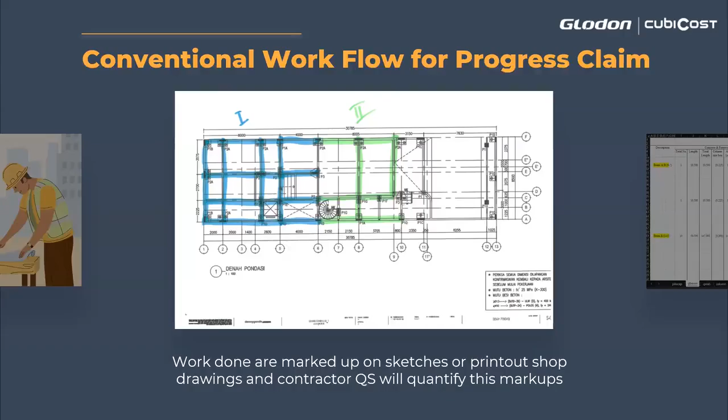And then during the site walk, QS will normally hold on to all these drawings and walk the site with the site supervisor or the clerk of works. When the clerk of works points out that this part of the works has been done, for example this part of the basement car park has been completed, the QS will take out the basement car park floor plans, and maybe use a different color or highlighter pen to highlight the different work done. For example, this part of the works has been completed up to concrete casting, and this part only completed up to the formwork.

After finishing the site walk, the QS will go back to the office. Based on the demarcated drawings, they will start to compute the total quantities for each completed work, most commonly in Excel spreadsheets, like what you are seeing now on the screen. This is something QS will normally compile inside Excel spreadsheets with all the columns and formulas preset and linked to multiple spreadsheets. They will measure on the drawings and key in the measurements on these spreadsheets to derive the quantities.

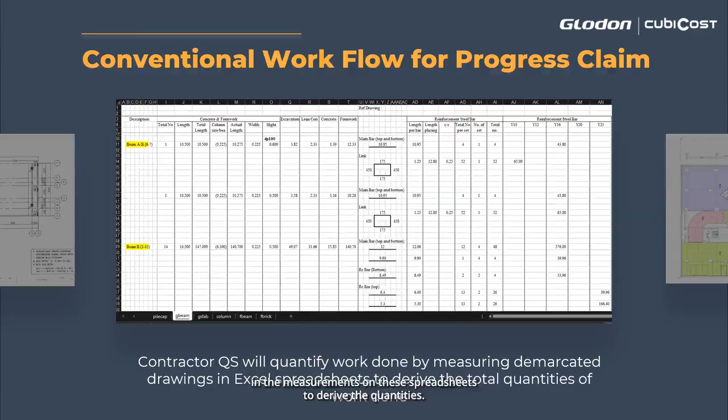After they finish with the measurements, they will update the total quantities to a detailed BQ, normally inside an Excel spreadsheet as well, complete with a cover letter and a few attachments like printed drawings with the color demarcations, and maybe other documents like your purchase orders for the material on site. All those will have to be compiled with the progress claim application, and then they will submit that to the consultant QS for valuation.

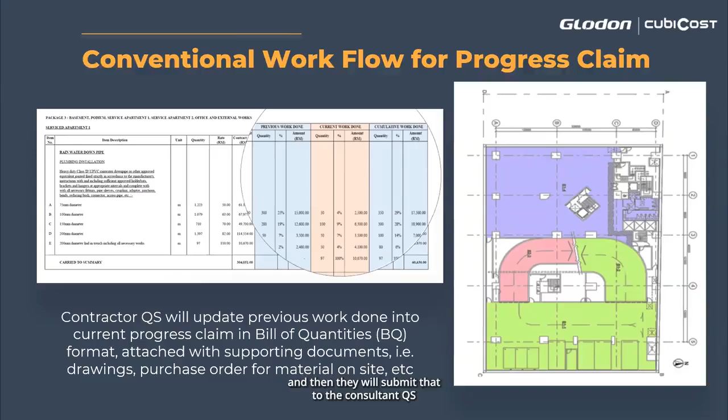So now I would like to run another live poll here. I would like to know, how do you prepare your progress claim currently? Is it based on manual measurements with Excel spreadsheets like what I mentioned just now, or are you utilizing some quantity takeoff software, maybe coupled with your Excel spreadsheets to work out the quantities, or are there other ways you are preparing your progress claim? All right.

I'm looking at the live poll results on my screen. I can see that again, the majority of you, like 70%, are still using manual measurements and Excel spreadsheets. Okay, I will let the poll run for another 10 seconds, then I will close the poll and show you the results. Okay, so I will end the poll now.

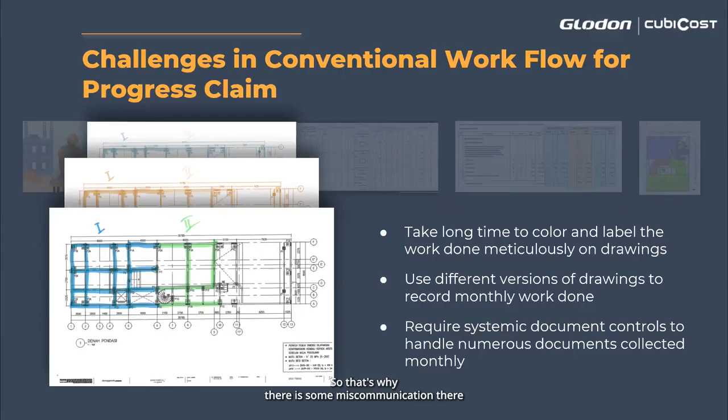Like maybe when the QS read the notes or the color remarks on the drawings, they might understand it differently from what the site supervisor wants to highlight there. So that's why there is a miscommunication there, and it will lead to the following challenges, whereby the QS may undermeasure or overmeasure in the computation of the quantities for the progress claim.

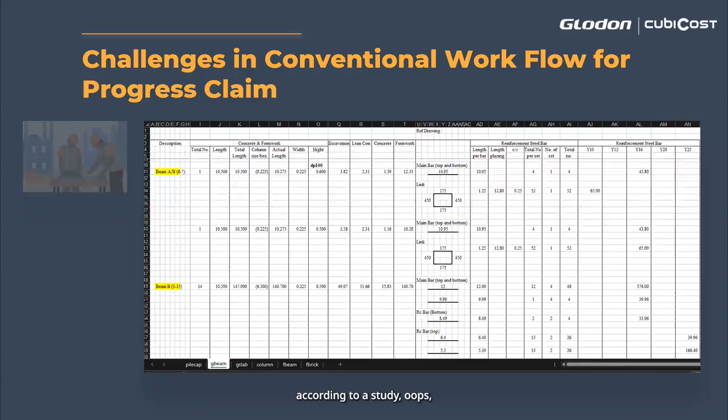So on top of that, the use of Excel spreadsheets for measurements is also another underlying issue. I think most of us somehow know that there are risks whenever we are using Excel spreadsheets. That's why we need to do a lot of checking. So don't take my word for that. According to a study by Carnegie University, actually 94% of Excel spreadsheets contain errors. So that is actually not something that we always hear.

I mean, the common errors normally include inaccurate data, and then errors from the spreadsheet that you reuse from your previous projects, because maybe inside there you already have some formula linking errors, and also maybe you have changed something that actually caused the formulas to become invalid. So all these kinds of errors are actually contained in Excel spreadsheets.

So to quote a case, I read somewhere that JP Morgan Chase once lost more than $6 billion in one of the incidents that was in part due to Excel spreadsheet errors, including copying and pasting incorrect information from multiple spreadsheets. So that's why we cannot underestimate the consequences of not checking the spreadsheets thoroughly before we use them to work out our progress claim work done.

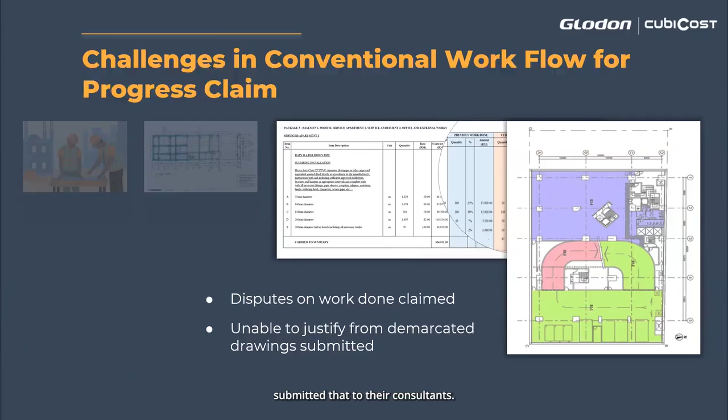So we can generally see that there are four main challenges in the conventional methods of preparing the progress claims. One is actually the efficiency. Let me pull out my laser pointer. Efficiency means it takes up a lot of time to actually complete the progress claim preparation and compilation works. And at the same time, in this post-pandemic era, a lot of physical interaction is unavoidable.

And then the accuracy of the quantification also becomes a question mark, because the errors may come from the Excel spreadsheets that they use to derive the quantities. Transparency means the justification work is actually hindered by the incomplete support documents submitted. And also, in the conventional ways the information is all unfederated, meaning it doesn't integrate well, and they cannot view the same information from a single source.

All right, so how can BIM solutions actually benefit the contractor QS and other stakeholders in a construction project?

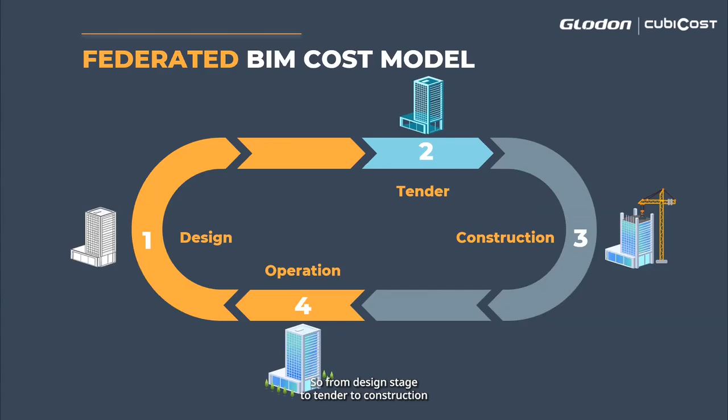So first of all, we need to establish a federated BIM cost model that can combine all the data into a single BIM model to be used throughout the whole project life cycle, from design stage to tender to construction, even to the operation stage.

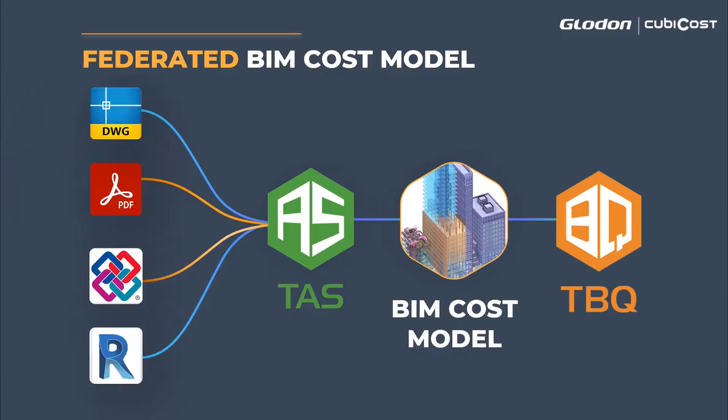So through TAS, contractor QS can import CAD drawings, PDF scan drawings, or even IFC or Revit files to TAS to build up a BIM 3D model. Then it links with the BQ prepared in TBQ to form the BIM cost model that we mentioned just now. So take a design and build contract as an example.

If you have a federated BIM cost model, it means you have to start modeling during the design stage already. During the design stage, you model it, and then when it comes to the tendering stage, the BIM model is already rich with all sorts of details. This can facilitate better resource and cost planning during the tendering stage, because you can use various construction zonings to improve the accuracy and competitiveness of your tender pricing when you are preparing it.

During the construction stage, the same BIM cost model can be passed on to the project team on site for further planning and scheduling, even for subcontracting works and progress claims. When you reach practical completion of your project, because you've been updating the BIM cost model during construction, it will become a perfect as-built model for finalization of account.

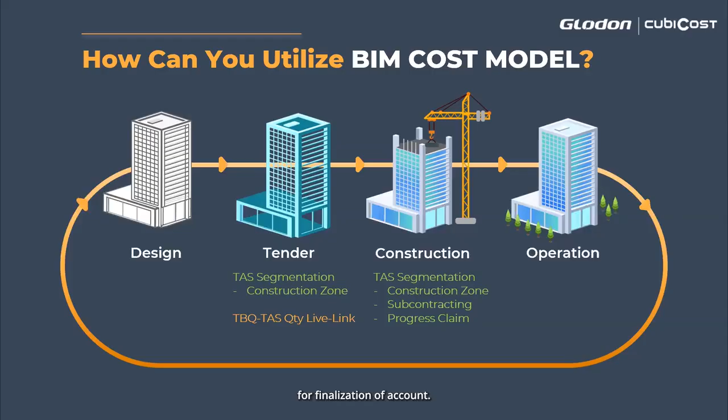In the TAS C4 version, which we launched earlier this year, we added a very useful feature for dividing the BIM cost model to extract quantities segment by segment. We call it segmentation. You can find it in the element list, normally on the left side of the TAS working area. There are 4 types of site elements included in segmentation, designated for different user scenarios: construction zone, subcontracting, progress claims, and even custom.

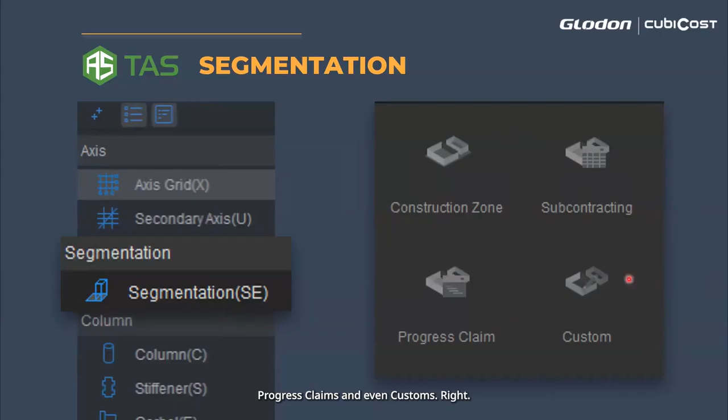Nowadays, construction projects are getting more and more complicated. It is unavoidable that you need to manage multiple layers of contractors and subcontractors on site concurrently. I believe it is very common to establish proper zonings for your site based on construction sequences or even milestones, so that you can easily coordinate which group of subcontractors works on site at the right schedule to avoid congestion on site.

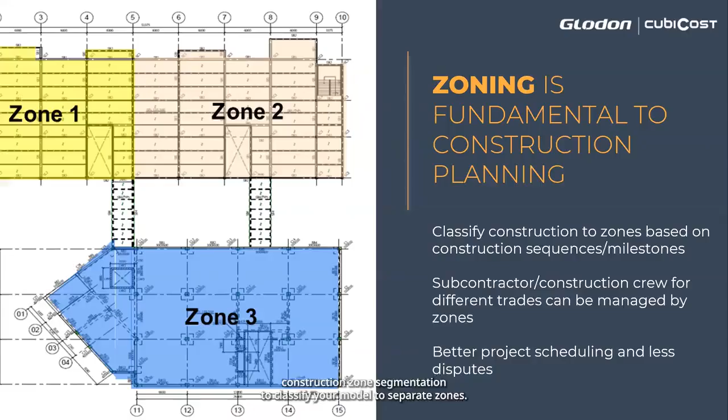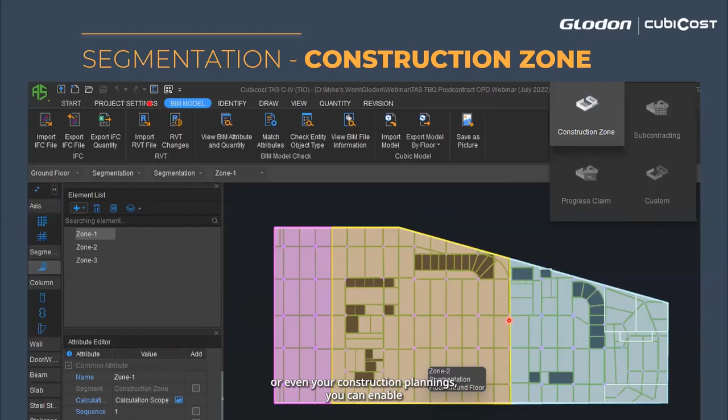So in TAS, you can use construction zone segmentation to classify your model into separate zones, like the one you can see on the screen now. You can clearly pull out an area on the floor plan to mark it as zone 1, zone 2, or zone 3 with a different fill color. During the extraction of quantities for your progress claims or construction planning, you can enable the construction zone classifications and view the quantities for your elements segregated according to the zones defined earlier, in this kind of format. It makes it easier for you to extract the quantities from here.

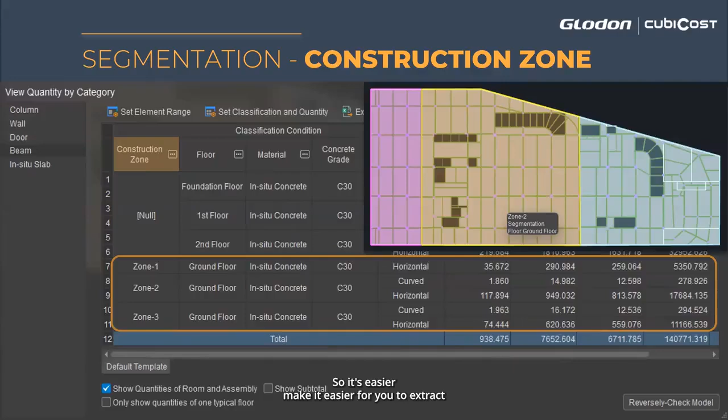The same goes for subcontracting segmentation. You can use this to define the areas for each respective subcontractor. For example, if the construction area is too big, normally the main contractor will engage 2 subcontractor teams to work together on that particular floor plan. Therefore, it is very important to clearly divide the work to avoid consequential conflicts on site, as well as future disputes on the portion of work between these two subcontractors. In the conventional way, you may need to carefully identify and segregate the quantities for different subcontractors in Excel spreadsheets.

If these processes are not taken care of, it may cause double measurement of quantities, where items you already appointed to one subcontractor may appear in another subcontract package as well. These are something the QS needs to avoid once and for all during construction.

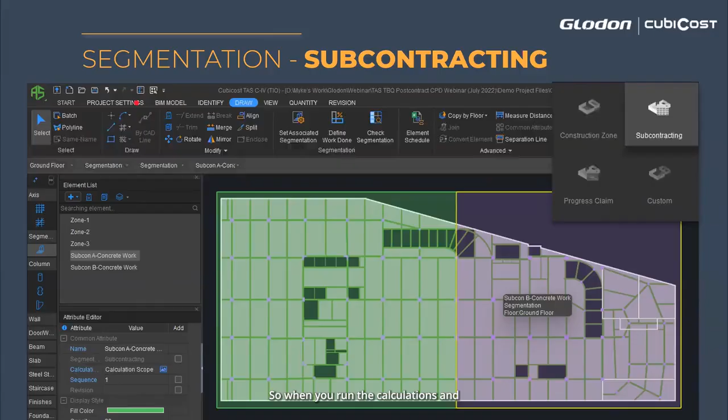But using subcontracting segmentation, it will automatically help you divide the quantity. When you pull out the areas like this, maybe this one is subcontractor A and this one is subcontractor B on your model. When you run the calculations, the results will segregate the quantities according to the zones or subcontractor segmentation that you have defined earlier, giving you very clear-cut quantities to be used for your subcontract documents, or even for the valuation of the subcontractor's progress claims.

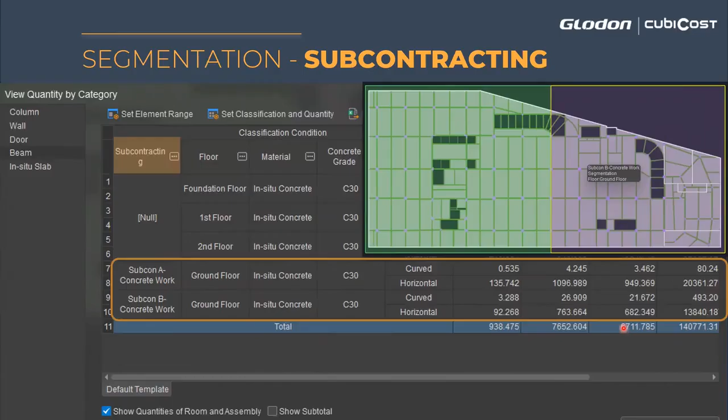So for progress claim segmentation here, it can be used the same way as the construction zone and the subcontractor segmentation I showed you guys earlier, but we designed it with additional functions to work together with the progress claim segmentation to give you more flexibility when using it to divide and extract the quantities.

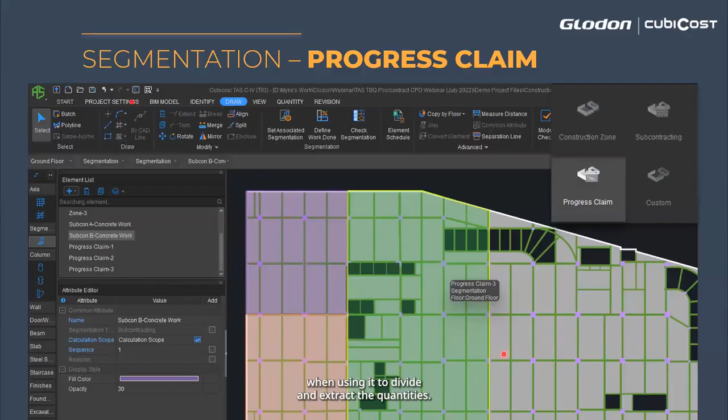Because on site, there are a lot of instances where the work done you want to claim is actually by elements. For example, refer to these drawings over here. QS will normally draw on the drawings, right? They will make some color demarcation on the drawings. Maybe they will pull out these blue areas, meaning all the structural elements, like the slab, beams, columns, are already fully completed.

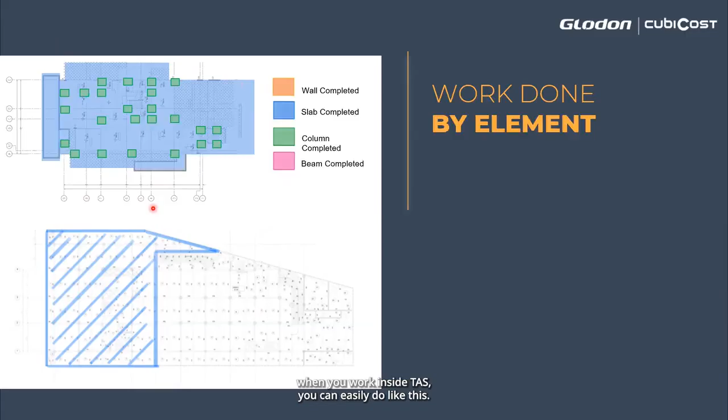So using this kind of demarcation drawing, when you work inside TAS, you can easily do it like this. You create a progress claim segmentation and define your calculation scope first. Then you just draw a segmentation on your drawings. Of course, for some items you want to exclude from this segmentation, you can select them and exclude them, like this. And then you calculate based on what you have segmented.

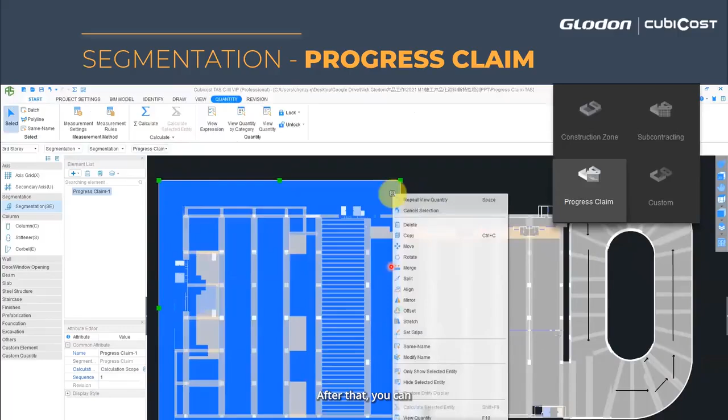After that, you can select the segmentation and view the quantities. You will get the quantities of all the elements defined and covered in that segmentation. When you choose to view quantity by categories to extract your quantities, you can enable the progress claim classification. Then it will further help you to segregate them.

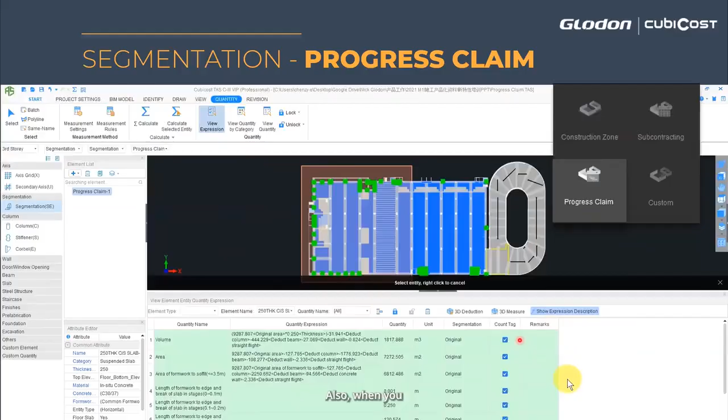Also, when you want to check or justify something like this, for a second, maybe I replay a bit for this part. Hang on, let me play. All right, hang on for a second. Okay, here. Sorry about that.

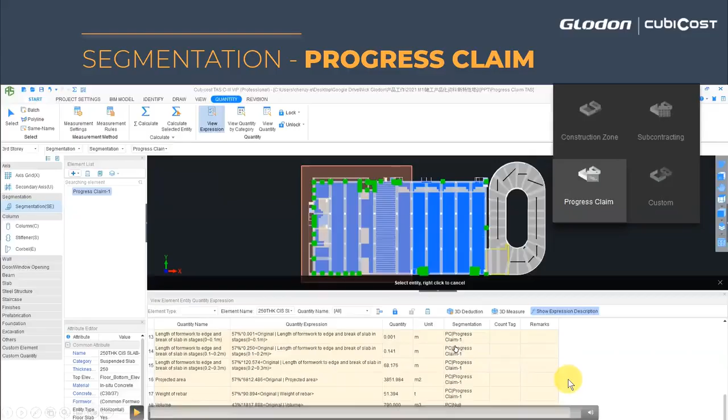What I want to tell is that when you are doing justification of work done for your progress claims to your consultants, you can always use the view expression here to check like this. You check certain elements, and it will tell you how these quantities are derived and which segmentation they belong to in your model here, right? All right, let me go to the next slide.

So what if your trade works on site have different progress? For example, in these drawings here, you can see some of the areas are marked with concrete already completed. And some of the areas, like here, the yellow and the green color, are overlapping. It tells you that these overlapping areas are already completed for the rebar and the formwork, but not yet complete until the concrete casting. So like this kind of scenario, right?

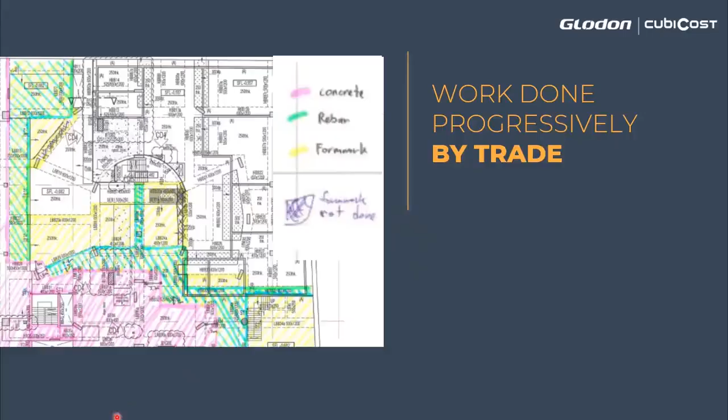To do that, you can draw the segmentation on the drawings, on the models, like what I showed you just now. Then you can select the elements within that segmentation. And then you use the so-called set associated segmentation function to define the trade work to be included. With the distinct color indication we put here, you can easily tell which part of the model is completed up to which particular trade works.

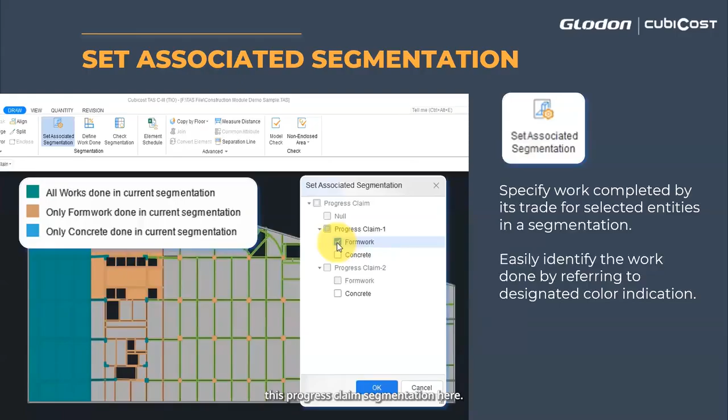So when you have set the associated segmentation that way and run the calculations, when you view your expressions or view the quantities by selecting any of the entities on the models, you can see they are segregated accordingly, right? So you can see inside here.

So the formwork, because for this particular item I only claim the formworks in progress claim number 1. That's why progress claim number 1 will only show me the area of the formworks quantities. And then here, I claim another one, the concrete volume, for my progress claim number 2. That's why it's shown in blue color. So it will show additional rows over here to show me that concrete is being claimed 100% in progress claim number 2.

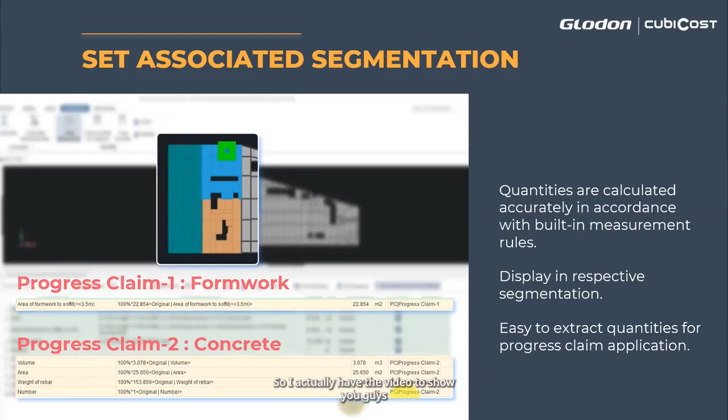All right. So it makes it easier for you to check your quantities and also to extract the quantities for your progress claim as well. So I actually have a video to show you guys next to see how to set the associated segmentation.

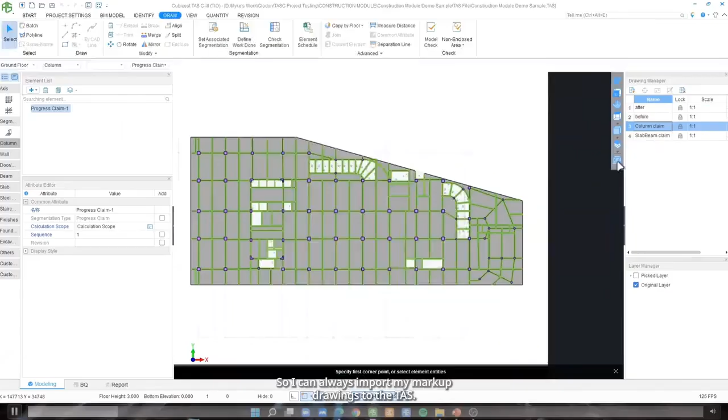All right, you can see here we create a progress claim segmentation first, and then I define maybe I want column, beam, and slab to be included in this segmentation. So I can always import my markup drawings to the TAS. And now, because this one is columns, I just show all the columns, and then I select the columns accordingly.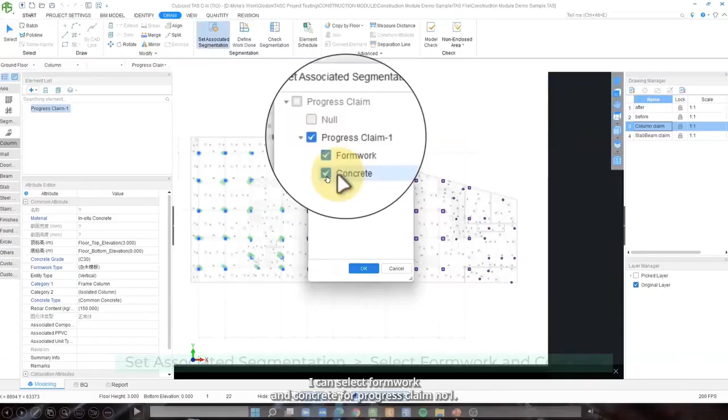Then you see here, for this part of the columns that I selected, the notes mean the site supervisor already told me that these columns are completed: formwork, rebar, and also concrete. So that's why I can select formwork and concrete for progress claim number 1.

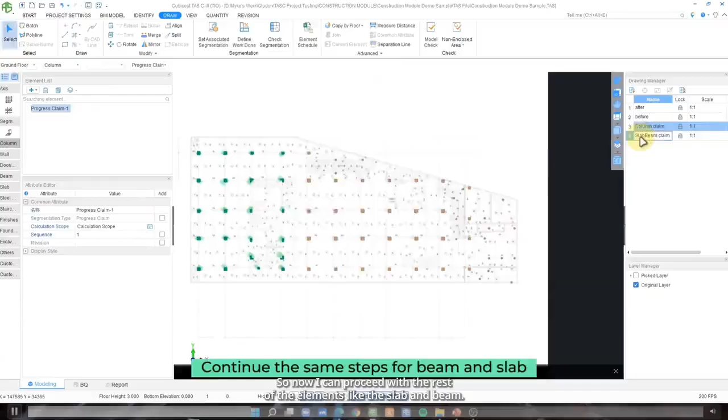And then the rest of the columns like this, I can select and go to set associated segmentation. For this part of the columns, I just want to claim formwork, so I just select formwork and click OK. Now I can proceed with the rest of the elements like the slab and beam and repeat the same step. I select and set associated segmentation to define what trade works are to be included.

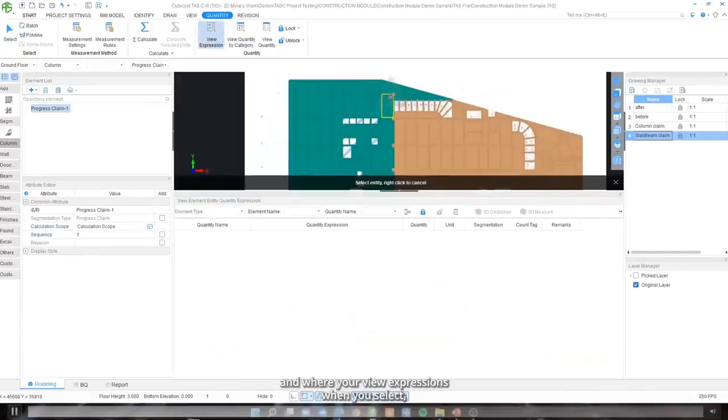After that, I run the calculations. The calculations will be based on the built-in measurement rules, and all the deductions will be automatically processed. And then when you click on the elements on the model, you can see in the view expression or the view quantity panel that this particular entity is claimed 100% for the formworks and also the concrete volume.

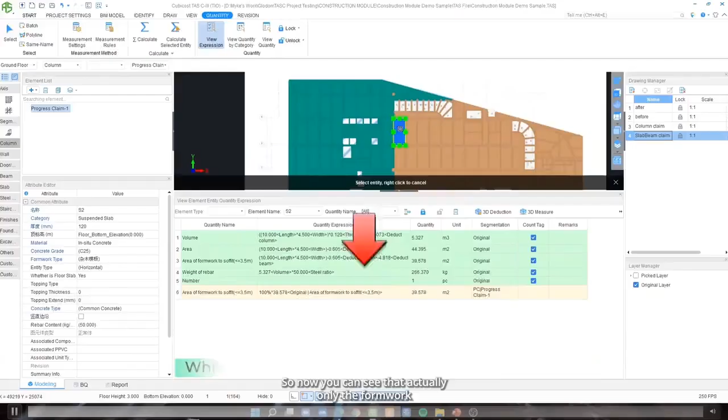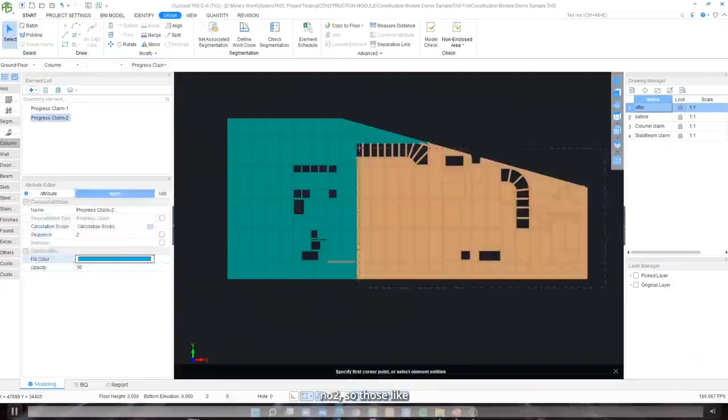And then when I select another one, which is in the peach color, you can see that only the formwork quantities are being shown inside the view quantities or view expression here. And then when you want to extract your quantities, now I show you how I continue on for progress claim number 2, where I complete those with the concrete.

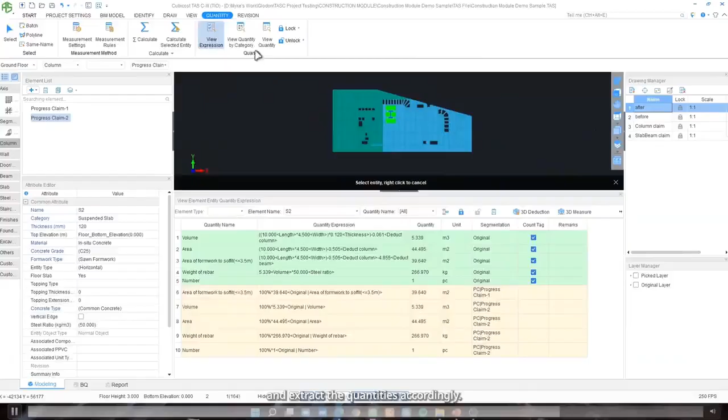And then when you run the calculations, it will show you that this part of the formwork is inside progress claim number 1, and the concrete is inside progress claim number 2. So it will be easier for you to view and extract the quantities accordingly. This also works in the view quantity by category. When you enable the progress claim classification, you will be able to see these quantities automatically defined according to progress claim.

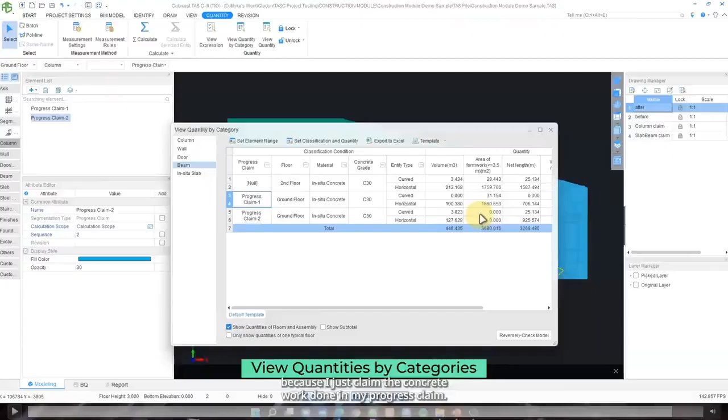You can see that in progress claim number 2 here, the area of formworks is showing 0, because in progress claim number 1 I already claimed my formworks quantities, and progress claim number 2 will only show the concrete, because I just claimed the concrete work done in progress claim number 2. All right. So that shows you how it works for different trade works completion.

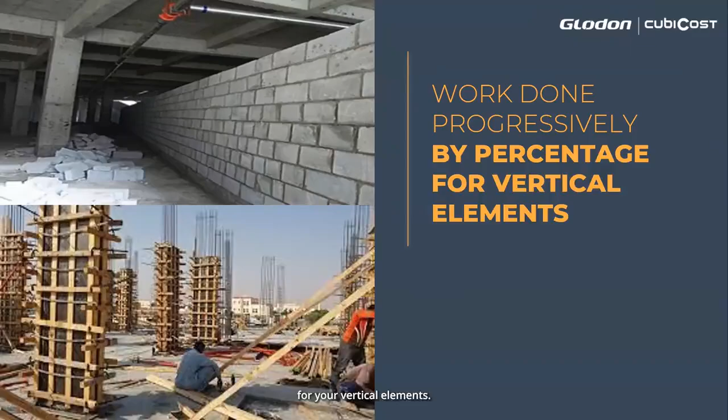So another one is work done progressively by percentage for vertical elements. Occasionally you will do some vertical progressing like this, so maybe you will want to claim not the full quantities for your vertical elements, right? We have the flexibility to do so. We have this define work done function that you can make use of to deal with this kind of scenario, to define a custom percentage for the work to be quantified.

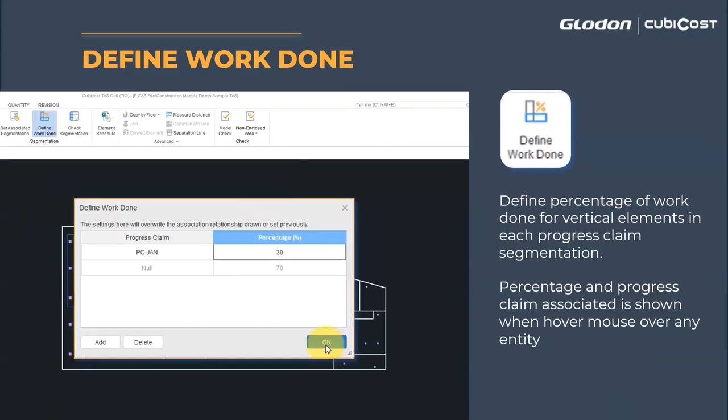So what you need to do is select the entity, click on the define work done function, and set a percentage for those selected elements to claim for that particular segmentation. And then when you calculate, inside the view expression and the view quantity by category, you will see that the quantities are automatically divided according to the percentage that you defined earlier.

You can see on the top part here, the quantity is already multiplied by 30%, because for progress claim number 1, for that particular element, I just want to claim 30%. So with that custom percentage, the software will automatically multiply it and derive the quantity for you. It will also label it according to your segmentation as well.

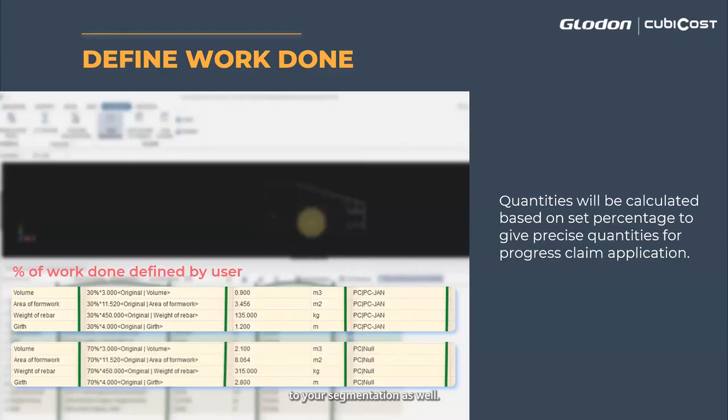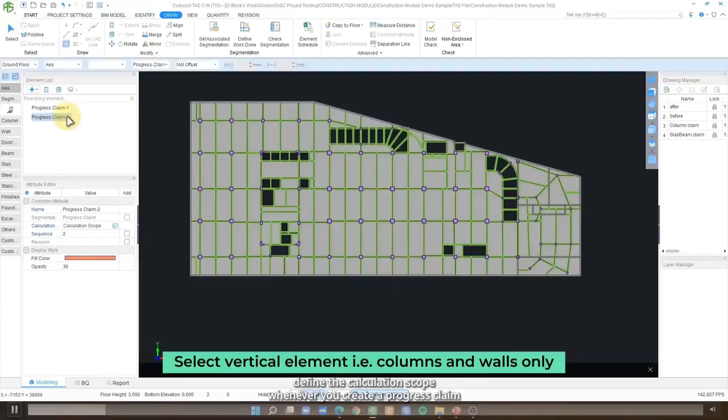All right, the next one is the video to show you guys how it works. Okay, define work done. So the same thing, I show you guys here, I create 2 progress claim segmentations first. One is the first progress claim, and then another one is progress claim number 2. And then of course, you have to define the calculation scope whenever you create a progress claim.

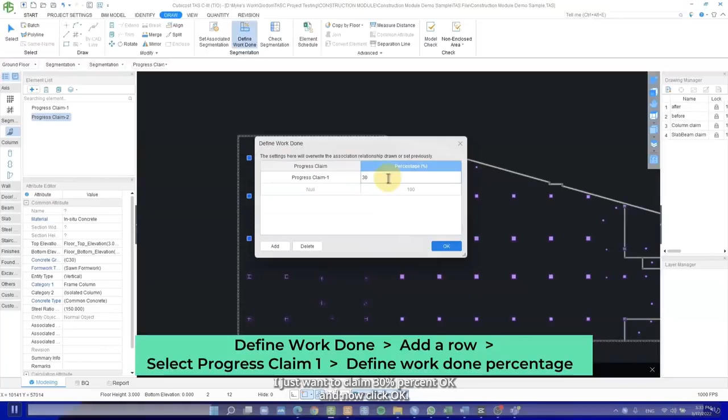Okay, now I hide all my horizontal elements. I just show the vertical elements here. So I select maybe this part of the columns, right? I want to define the work done like this part of the work done. In progress claim number 1, I just want to claim 30%. And then I click OK, then it's already set for those particular items to be quantified only 30%. So we are already done with progress claim number 1.

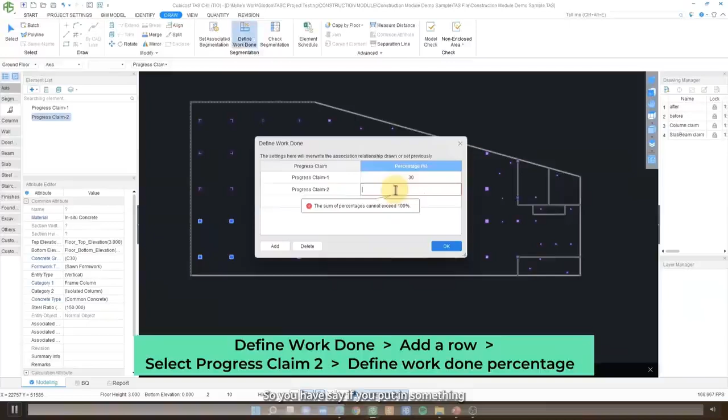So now we continue to progress claim number 2. So I select some of the columns here. I can add another row. Okay, I just define for progress claim number 2, I want to claim the rest of the percentage. So let's say if you put in something that makes it exceed 100%, then it will prompt you guys on that. So I continue on for all the rest. And then when I run the calculation, I will be able to see that the quantities have been multiplied according to the percentage I defined.

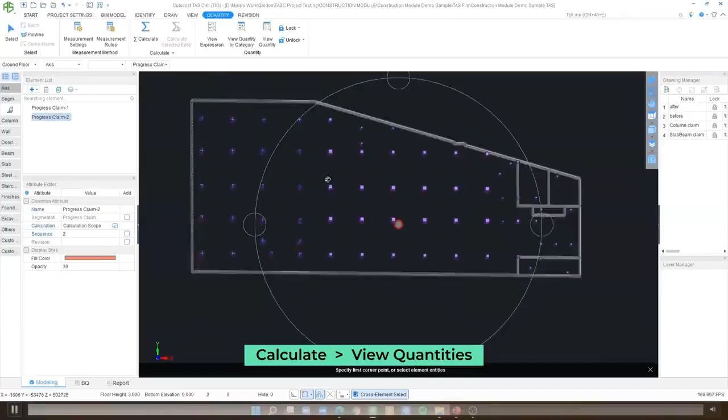So what I want to show you guys here is actually when you view your model in 3D, those hatch lines actually denote that the works have been modified manually to your own percentage. Means you know that, okay, these work done are not claimed 100%, but to a custom percentage that you define.

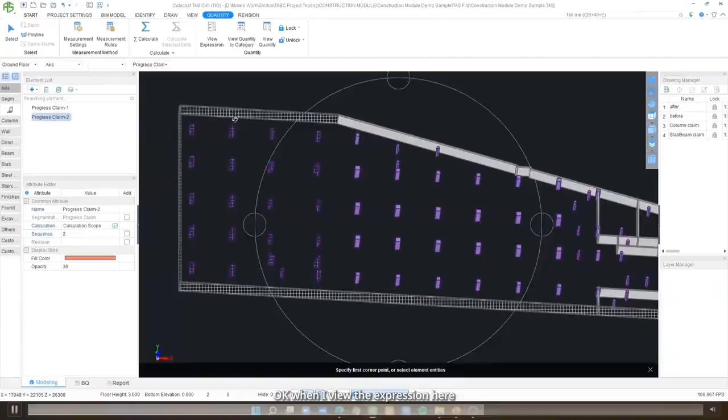Okay, when I view the expression here, when I select the quantity, you can see that for this part of the work in progress claim number 1, this column I claim full, and then for these elements, you can see that the columns I claim for 30%, and then the rest of 70% is in progress claim number 2.

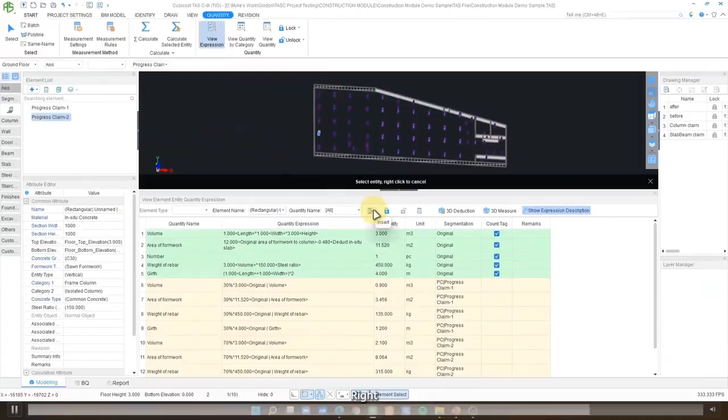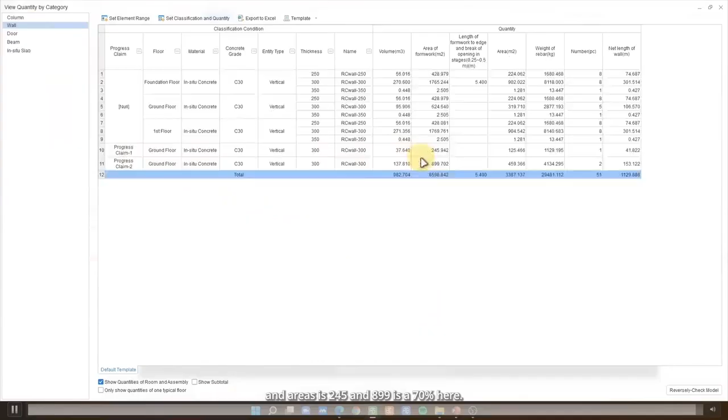All right. And then same goes to the view quantity by category as well. You'll be able to see that the quantities shown here are actually already multiplied with the percentage to derive the accurate quantity for you. So you can see progress claim number 1, and then the area is 245, and then 899 is the 70% here. All right.

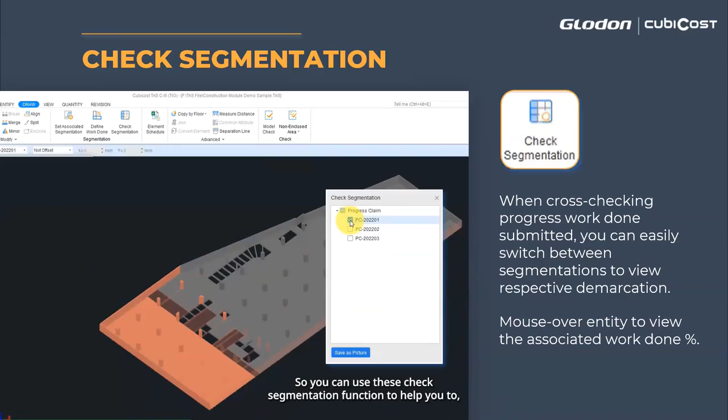And then the next one is check segmentation. So I believe that when you have processed multiple progress claims along the way, there are times that you might want to revisit what work done has been claimed in different progress claims. So you can use this check segmentation function to flexibly view what work done is claimed in different segmentations. When you click on this check segmentation, it will pop out another window here. It will show you all the progress claim segmentations that you have created.

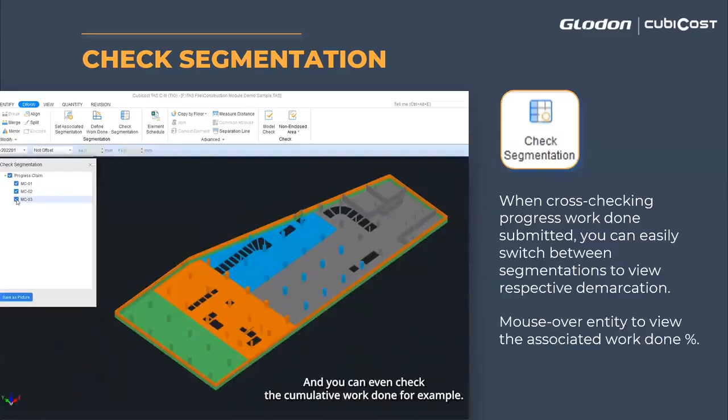And then you can check the box, and it will show you in real time which part of the model belongs to progress claim number 1. And then you can even check the cumulative work done. For example, you check all 3 boxes of the progress claims, then it will combine them into one single image, to show you the green color is progress claim number 1, the orange color is progress claim number 2, and the blue color is progress claim number 3.

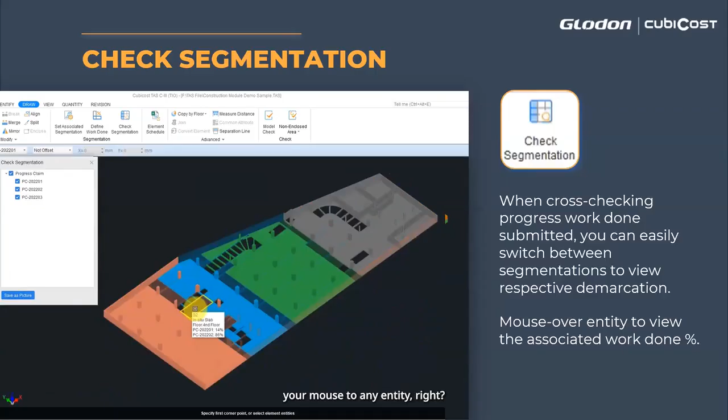Okay, so another one is when you hover your mouse over any entity, right? It will show you information like which progress claim it belongs to, and how many percent as well, like what you see on the screen now.

So whenever you want to use this check segmentation image to prove to your clients, you can always save it as a very high definition JPEG file. You just click on the Save As Picture function. It will save it to your desktop, and then you can use it to further explain to your consultant as well for the justification of the work.

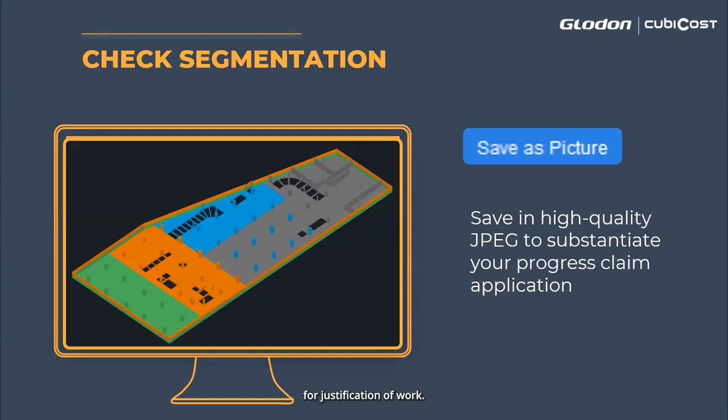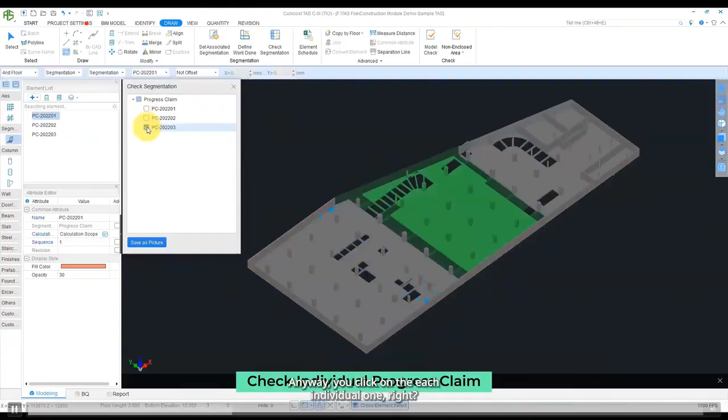So this is actually how it works in the video. So like what I say, when you click on the check segmentation, you will see these pop-up windows, and then you will list down all the progress claim segmentation. Let me hide it first. And then when you click on each individual one, it will actually show you in real time on the model which of the progress claim.

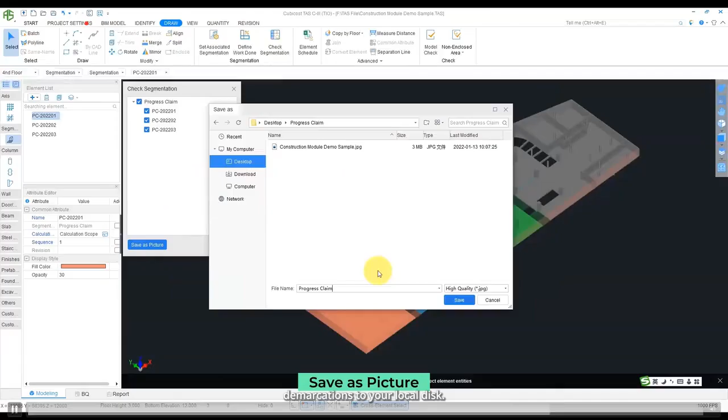And then when you select all, then you will actually combine everything. And then when you hover your mouse over, then you will see the information. And then you can always click save to save your high definition picture of these demarcations to your local disk, or to actually save it and email it to your clients as well. Okay, that's how check segmentation works for you.

Okay, let's do a quick recap on what scenarios that I have actually covered just now. So basically, for segmentation, we have only 4 different major steps, as I listed down over here. So create a segmentation, next you associate the work done to the segmentation, and then you check what is actually covered inside that segmentation, and then lastly you will view your quantity for that particular segmentation.

So scenario 1 that I mentioned just now is actually construction zones. So if your work demarcation is based on your floor areas or different zonings, then you can first create the construction zone, and then you draw the work done in the construction zone as well. And then you use check segmentation to help you to clearly know which part of the model is being included in that particular segmentation. And lastly, use view quantity or view quantity by categories to see the segmented quantities and extract the quantities as well.

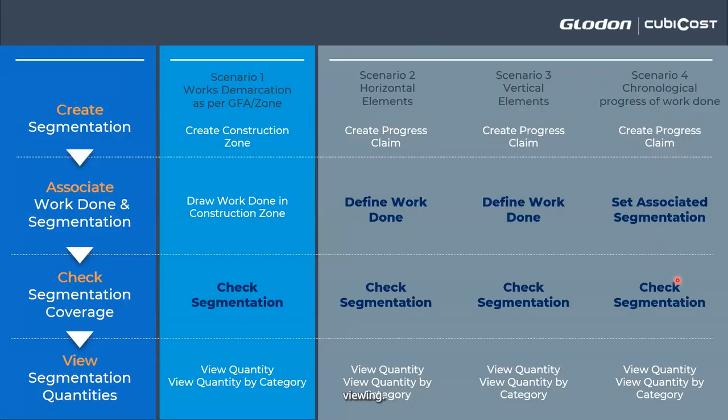All right. I think what I have shared with you guys earlier is actually about how QS can use the segmentation function to divide the quantities inside the models, to extract the quantities according to the right quantities inside that progress claim. So remember the challenge that I mentioned just now is the justification of the work. So normally when you, as contractor QS, submit your progress claims, majority of the times the consultant QS will challenge your quantities, like Mr. Contractor QS, why do you claim this much for this particular BQ item? So you need to justify your work by showing in the drawings or showing how you work out the quantities, right?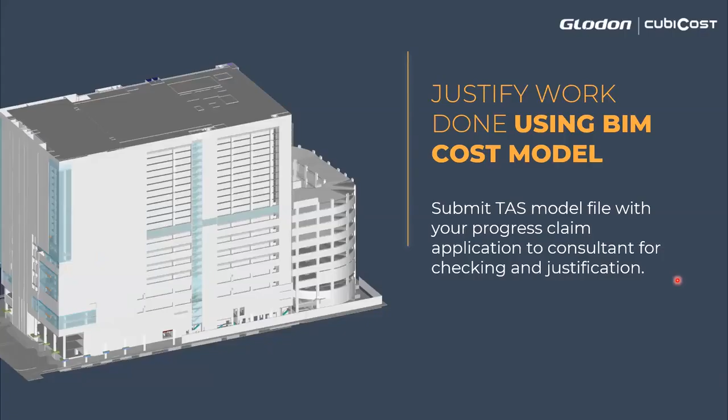So I can share with you guys one good example of our clients in Malaysia. The consultant actually requires the contractors to submit the 3D models alongside the progress claims to show the work done each month, instead of the conventional way of submitting hard copy drawings to the consultants. So the contractor will mark the work done in their 3D models using the segmentations, and share it with the consultants, with the clear demarcation within the 3D models.

Then the consultants and the contractors can easily visualize the work done, and they can easily come to a mutual understanding of what quantities have been generated, or what work has been claimed for that particular BQ item, and whether the quantities are actually correct can also be checked from the 3D models here.

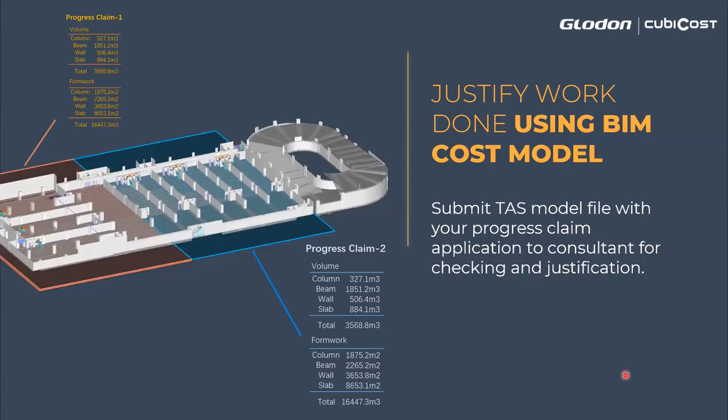All right, and then when you link your quantities to the BOQ, the bill of quantities that you have prepared in TBQ, you'll be able to see the quantity details to understand what you have included in the quantity that you claim in your progress claim. Which means every month you can actually generate a BOQ with the cumulative work done with the quantity details to justify what you are including inside this progress claim.